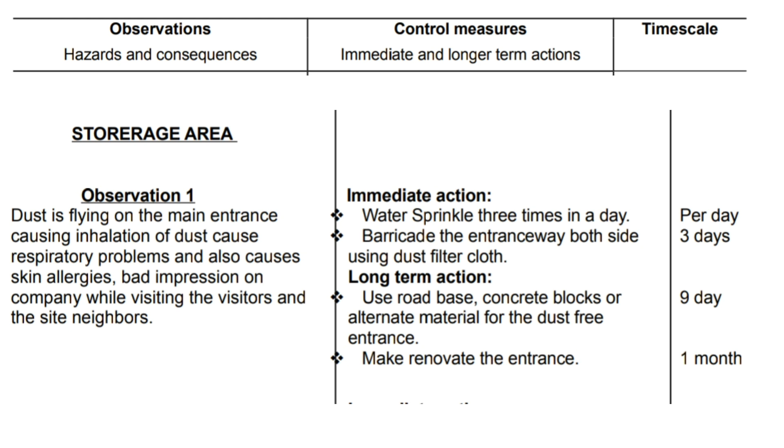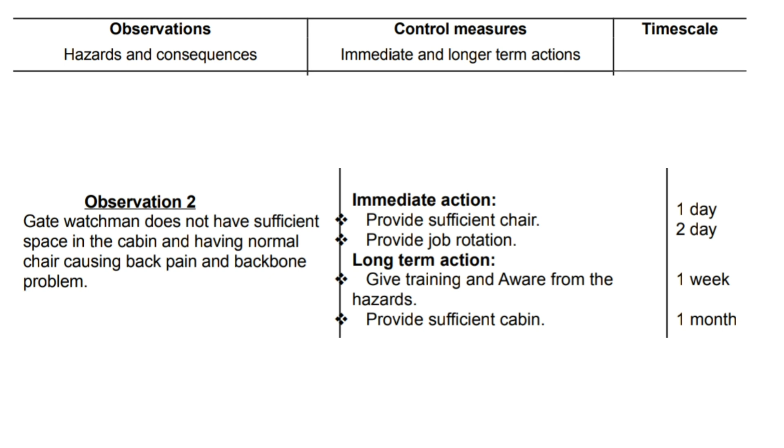Observation 2. Gate watchman does not have sufficient space in the cabin and is using a normal chair, causing back pain and backbone problems.

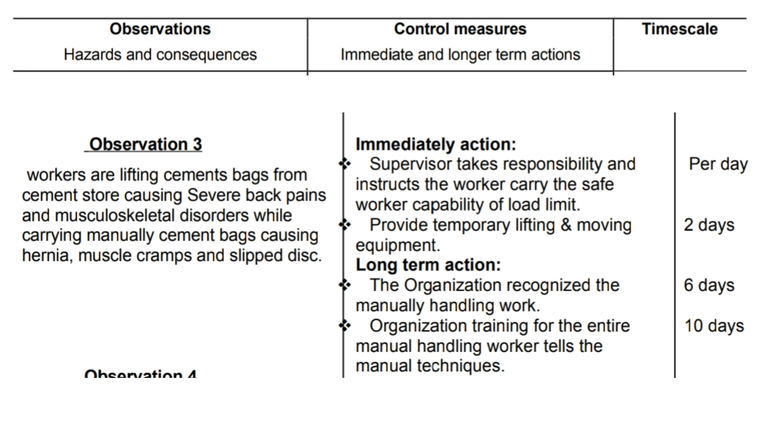Observation 3. Workers are lifting cement bags from the cement store causing severe back pains and musculoskeletal disorders while carrying cement bags manually, causing hernia, muscle cramps, and slip disc.

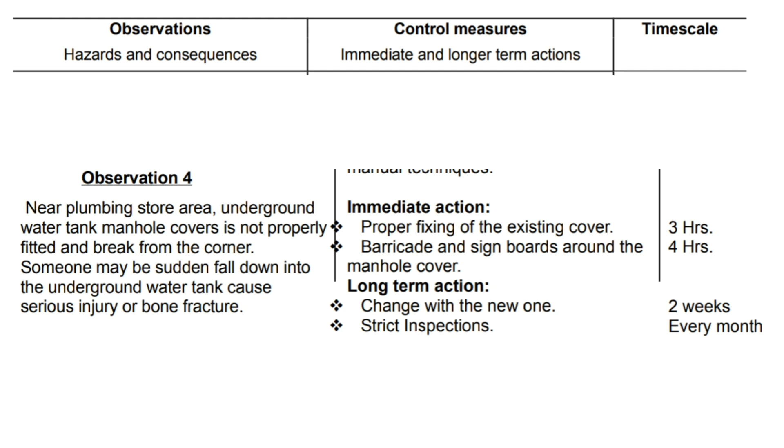Observation 4. Near the plumbing store area, underground water tank manhole cover is not properly fitted and is broken from the corner. Someone may suddenly fall into the underground water tank, causing serious injury or bone fracture.

Observation 5. In the cement storage area, workers are doing concrete work in an open area under the sun. The workers are exposed to dehydration and heat stroke.

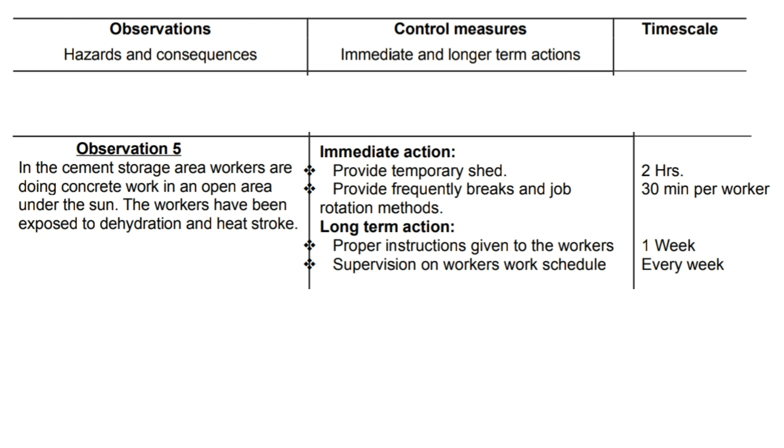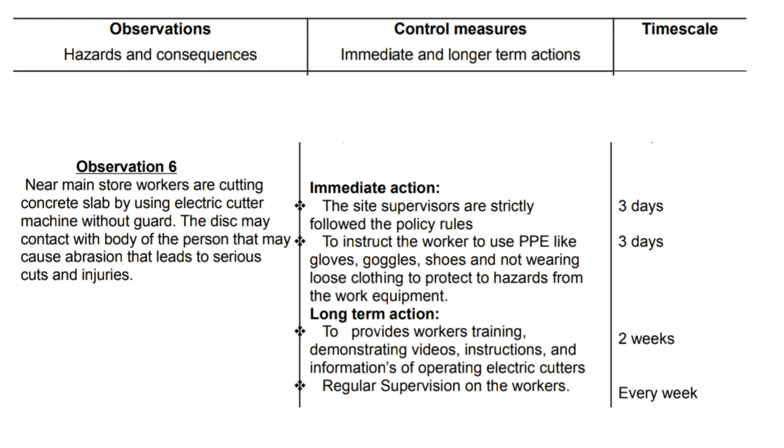Observation 6. Near the main store, workers are cutting concrete slab using an electric cutter machine without a guard. The disc may contact the body of the person, causing abrasion that leads to serious cuts and injuries.

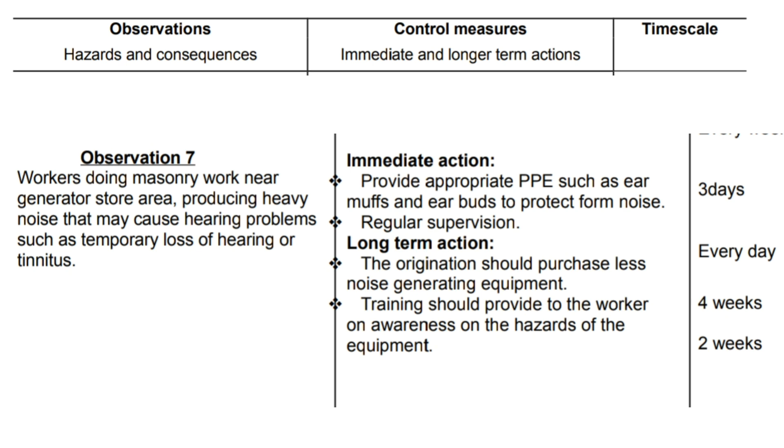Observation 7. Workers doing masonry work near the generator store area are producing heavy noise that may cause hearing problems such as temporary loss of hearing or tinnitus.

Observation 8. At the backside of the main store, a mobile crane is lifting wooden materials from the store to the 4th floor, and the crane belt is worn out on one side, causing sudden fall of materials on workers on the ground, leading to serious injuries or accidents.

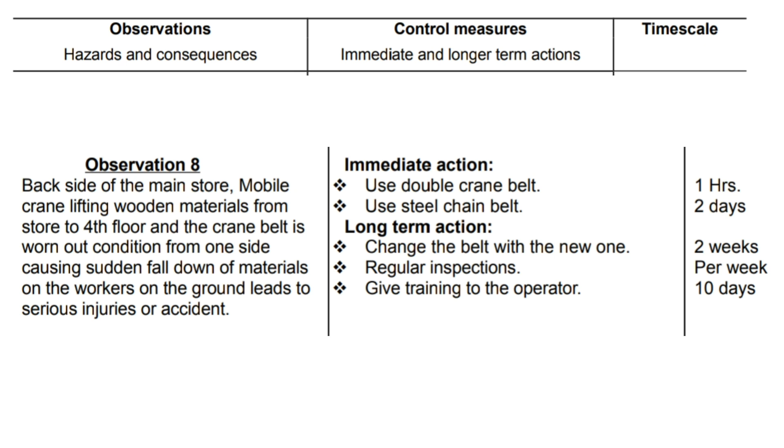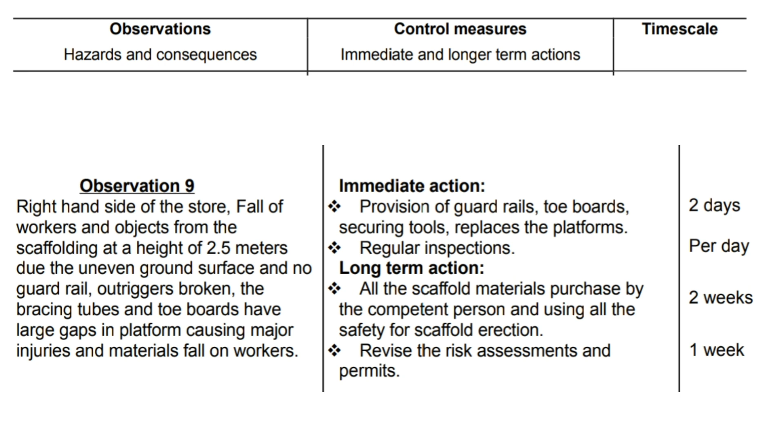Observation 9. On the right-hand side of the store, workers and objects fall from scaffolding at a height of 2.5 meters due to uneven ground surface and no guardrail. The outriggers are broken, the bracing tubes and toe boards have large gaps in the platform, causing major injuries and materials falling on workers.

Observation 10. Around the storage area there is no directional signboard in the blind spot. Vehicles are loading and unloading materials and reversing without a signal man's help. The reversing vehicle may hit workers or collide with columns, leading to serious incidents like workers being hit causing bone fracture.

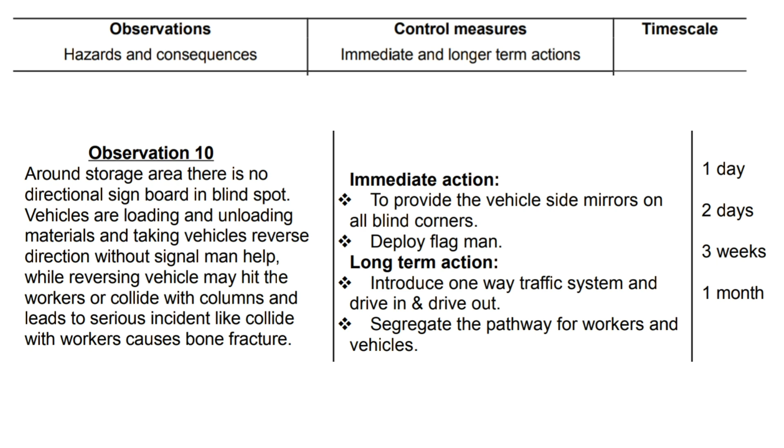Observation 11. In the construction site, trailing cables are obstructing the emergency exit. During any emergency incident, workers and visitors may slip and trip due to trailing cables, causing bone fractures.

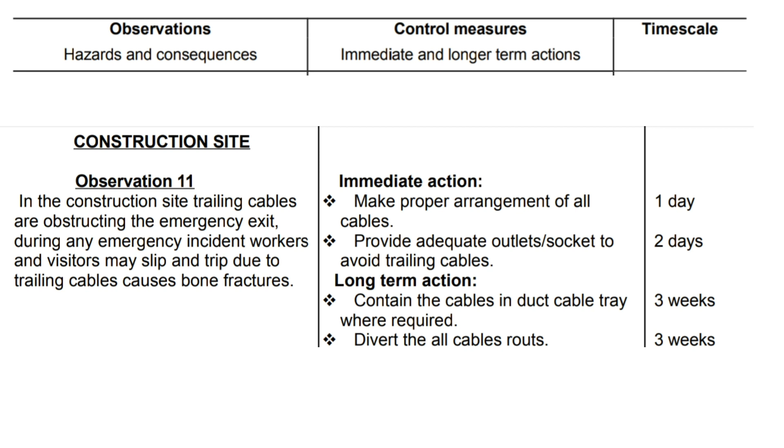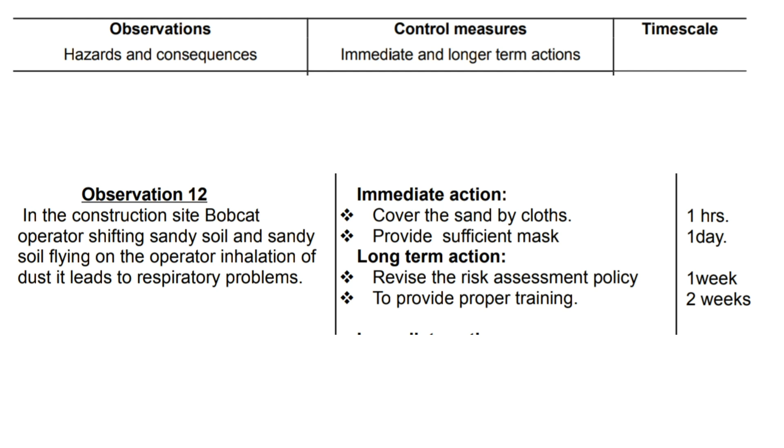Observation 12. In the construction site, the bobcat operator is shifting sandy soil and sandy soil is flying on the operator. Inhalation of dust leads to respiratory problems.

Observation 13. In the construction site, the compressor machine produces a lot of noise; some workers working nearby suffer hearing loss and tinnitus.

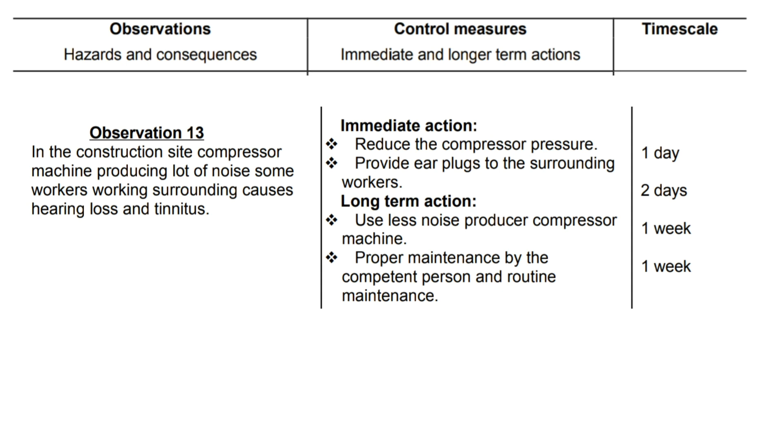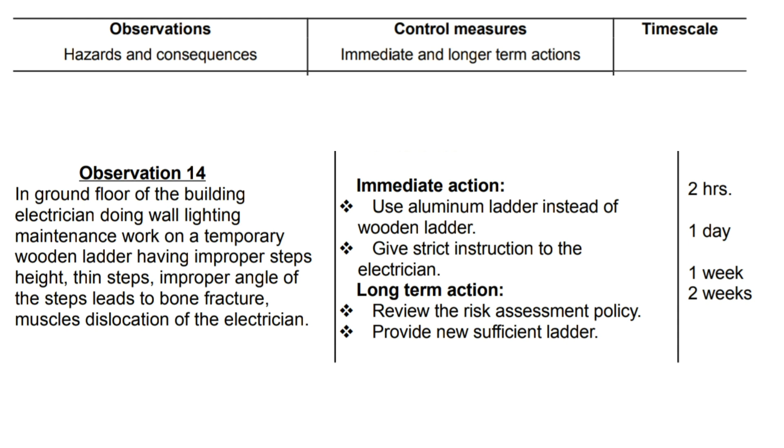Observation 14. On the ground floor of the building, an electrician is doing wall lighting maintenance work on a temporary wooden ladder having improper step height, thin steps, and improper angle of the steps, leading to bone fracture or muscle dislocation of the electrician.

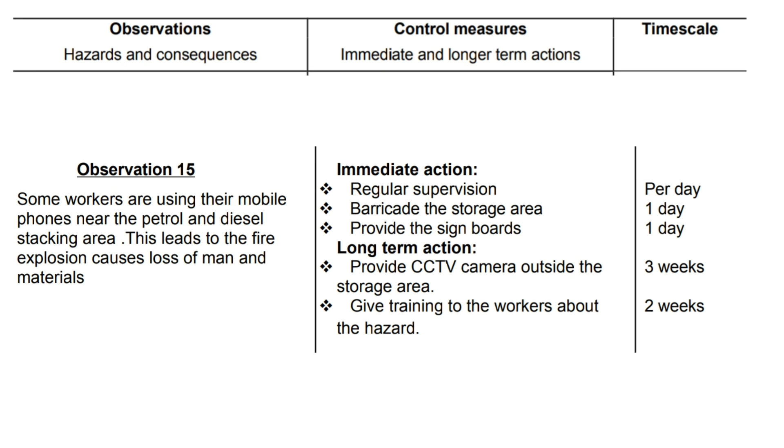Observation 15. Some workers are using their mobile phones near the petrol and diesel stacking area. This leads to fire explosion, causing loss of man and materials.

Observation 16. A joint electric cable passing through the petrol and diesel stacking area causes short circuit which leads to an explosion, causing loss of property.

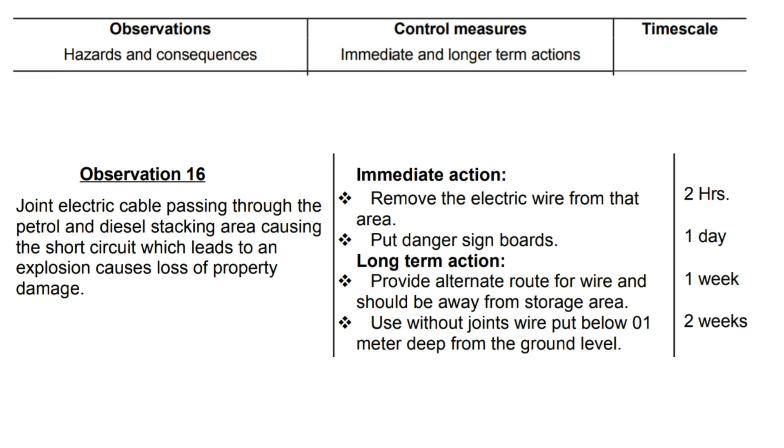Observation 17. In the construction site there is one oxygen and one acetylene cylinder stored. Workers are doing welding work behind the cylinders, and welding sparks are falling on the cylinders. It leads to fire explosion, causing serious burns and injuries to workers, visitors, and surrounding people being injured.

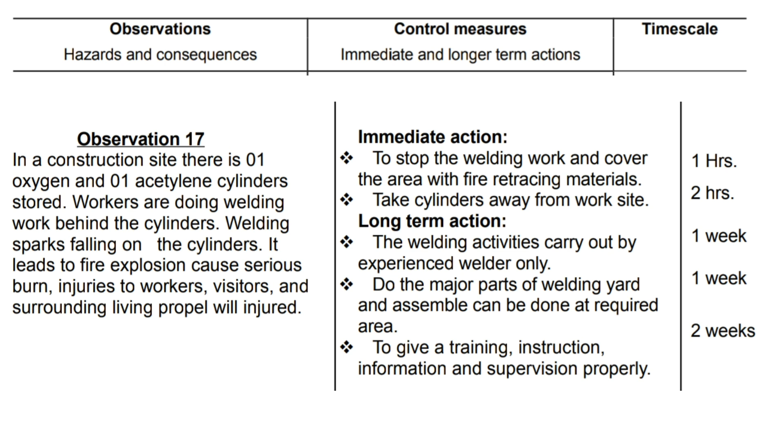Observation 18. A welder is cutting dowel bars on the first floor outside the wall using a gas cutter. The sparks from the steel bars fall on the acetylene and oxygen cylinders on the ground, resulting in an explosion causing a fatal accident.

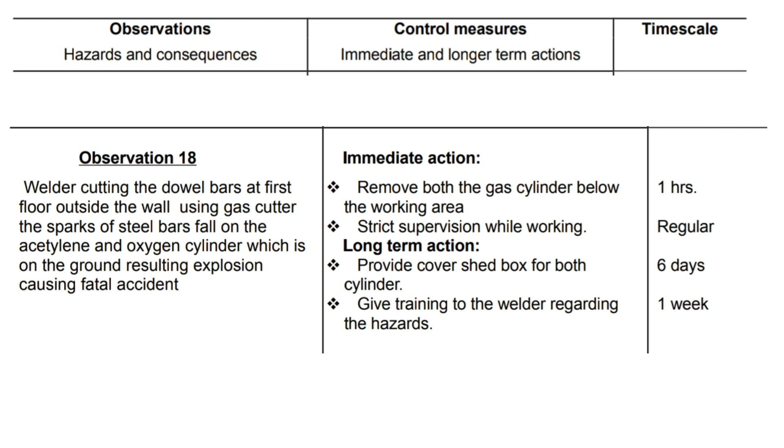Observation 20. On the first floor, a duct worker is doing demolition work using a jackhammer to cut the concrete slab and is exposed to vibration. Because of the vibration the worker may face problems of white fingers, muscle weakening, and joint damage.

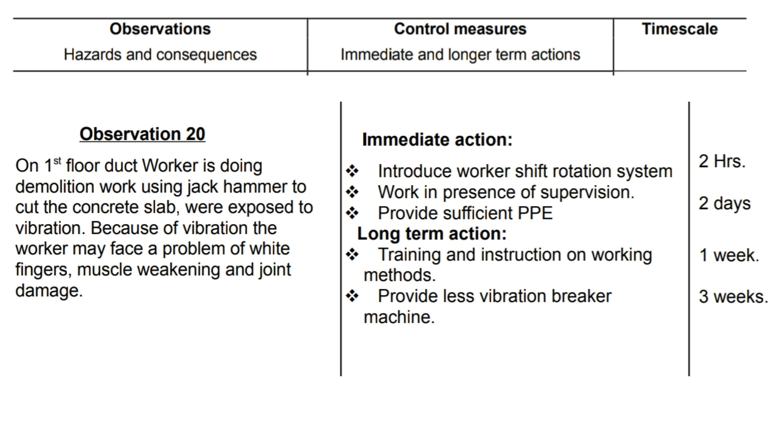Observation 21. On the second floor, the lift shaft door barricading is damaged and there is no signboard. It leads to fall of man and materials, causing bone fracture of workers, and potential loss of someone.

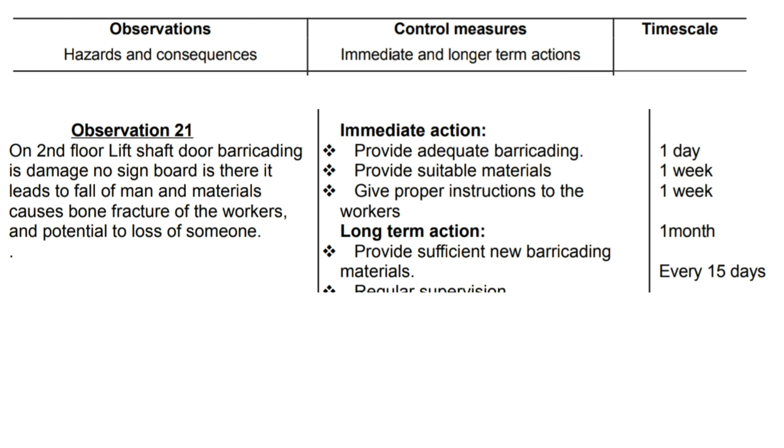Observation 22. Electrical wire is dipped into the debris on the fourth floor of the building, causing short circuit, electric shock to workers, and chances for fire leading to serious incident.

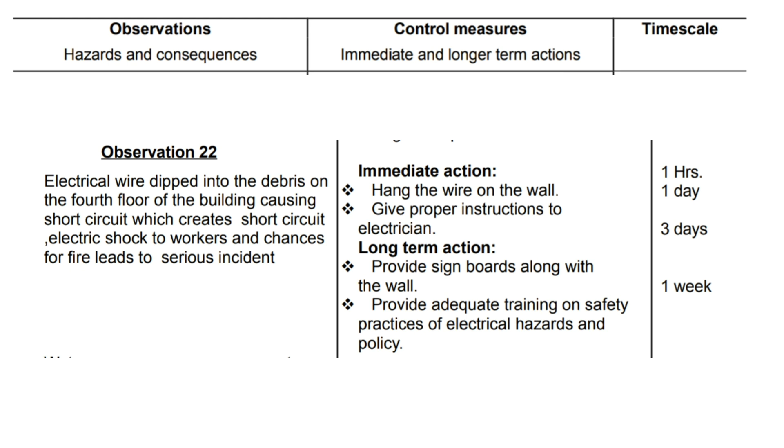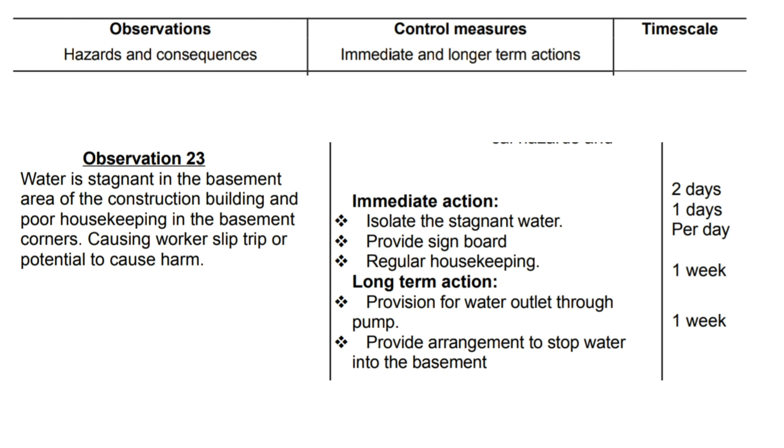Welfare area. Observation 25. I observed workers having their lunch with bread and chapatis wrapped in plastic bags and newspaper. This creates chemical reactions when plastic and newspaper surfaces are in contact with food. Newspaper ink is made from many dangerous chemicals which can lead to ill health problems or even cancer.

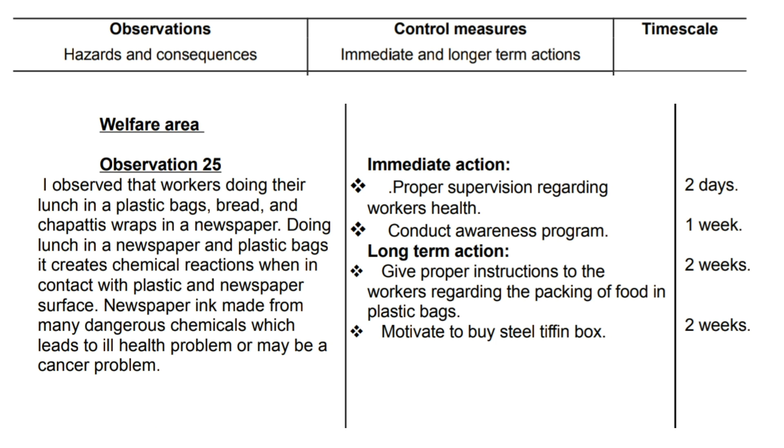Observation 26. In the construction site, the organization has provided locker facility for trade workers.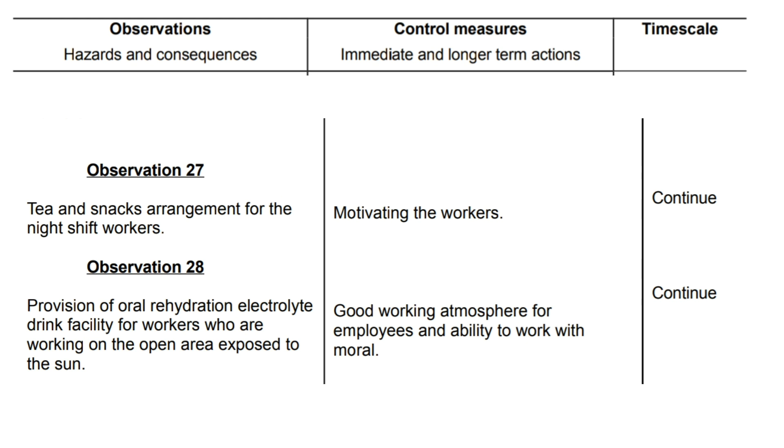Observation 28. Provision of oral rehydration electrolyte drink facility for workers working in open areas exposed to the sun. Observation 29. At the work site, sufficient toilets for workers and separate toilets for visitors are maintained neat and clean, with provision of hand wash facilities.